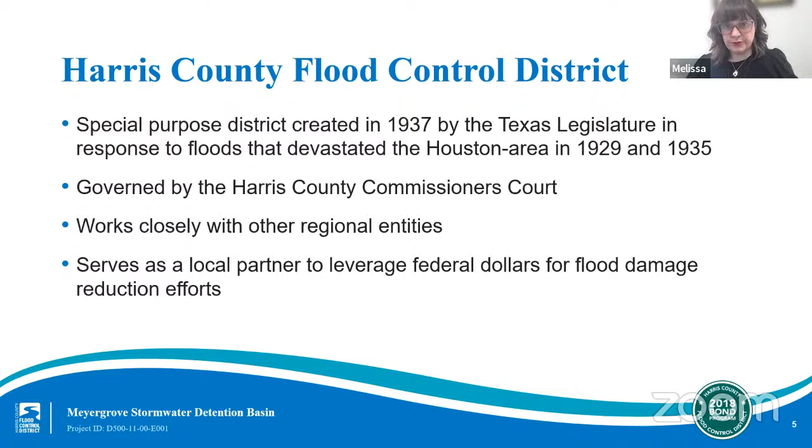The mission of the Harris County Flood Control District is to provide flood damage reduction projects that work with appropriate regard for community and natural values. One of the most difficult challenges we face is constructing effective projects that are sensitive to community and natural values in highly urbanized areas.

Harris County has 23 main watersheds, totaling approximately 1,800 square miles and more than 2,500 linear miles of channel—approximately the distance from New York to California. A watershed is a geographical region of land that drains to a common channel or outlet, and each watershed has its own characteristics and needs. The project we're presenting on tonight is in the Brays Bayou watershed, located in southwest Harris County.

Harris County and our surrounding area is flood prone for a number of reasons. We experience extreme rainfall events, including tropical storms and hurricanes. Our area is largely made up of flat, slow draining land. And finally, we see large concentrations of clay soils that do not soak up excess rainfall quickly.

While the Flood Control District plays a critical role in flood risk reduction, we are one of several entities involved in these efforts in our region. When rain falls on your roof, it flows through several jurisdictions, such as streets and drains managed by the Harris County Engineering Department, a municipal utility district, or a city, such as the City of Houston, before it flows into a larger channel, creek, or bayou that the Flood Control District owns and maintains. This slide illustrates the various jurisdictions, which sometimes we even share with other entities.

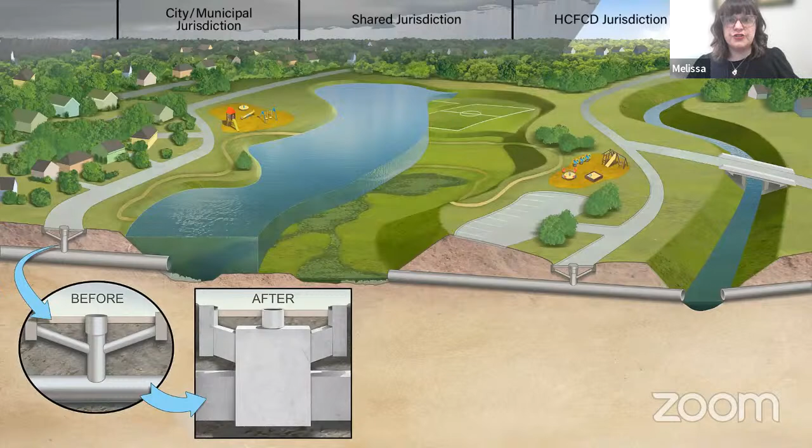In the middle is a stormwater detention basin, sometimes constructed by the Flood Control District. When storm sewers on the left are increased, this creates an increase in runoff. Since it is our policy to avoid any adverse impacts from our projects, detention basins help to safely take in and temporarily store excess stormwater during heavy rain events. Often we partner with Harris County precincts, utility districts, and others to add recreational amenities such as trails to these basins and along our channels.

On August 25th, 2018, Harris County voters approved $2.5 billion in bonds for flood risk reduction projects. This vote followed a series of 23 meetings with community members across Harris County, one per watershed, and resulted in a list of what is now 181 bond projects. 38 of those projects were added directly as a result of community input. The actual timing of each individual project will depend on a variety of factors, including environmental permitting, right-of-way acquisition and utility relocation, and in some cases, the requirements of a particular grant. Project lists and projected schedules are updated regularly on our website.

As bond projects move forward, we're making significant progress towards resilience in Harris County. We shared an update with Harris County Commissioners Court in January of this year and highlighted a few notable stats. We have completed or closed out 27 projects. We have secured $1.43 billion in partnership funding to stretch the bond funds even further for our community. And we've hosted more than 180 community engagement meetings. Your input is critical to our efforts, and we want to ensure that our conversations continue. We'll continue these biannual updates moving forward to share progress on the program.

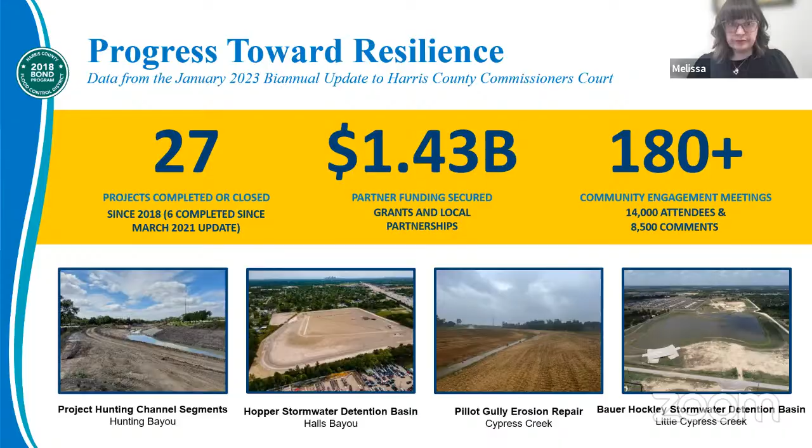While the bond was for $2.5 billion, the full cost of every single project in the bond tables is almost $5 billion. So we've made it clear from the outset that we would need funding partners to fully construct the projects in the bond program. As mentioned, we've had some success so far, having secured more than $1.43 billion in partnership funds for projects across Harris County.

This graphic illustrates the many sources of those partnerships, including federal, state, and local funding that the Flood Control District is working to secure for Harris County. Each agency has its own definition of eligible projects and its own requirements for local match funding, so the Flood Control District works diligently to match projects to the right partnership opportunities.

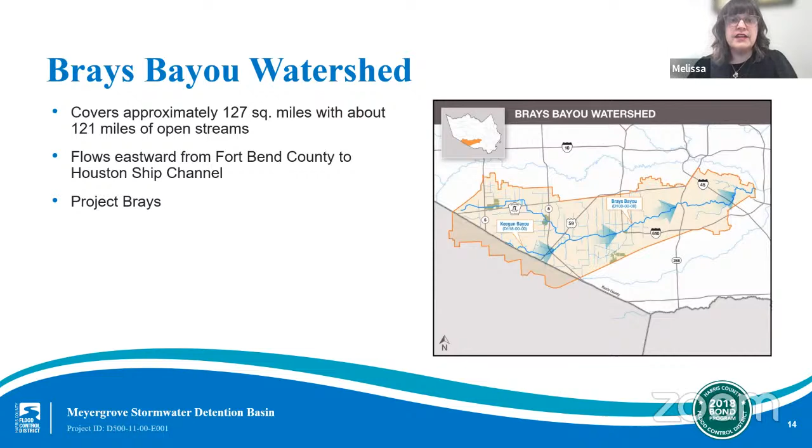The Harris County Flood Control District partnered with the U.S. Army Corps of Engineers on a major flood damage reduction project called Project Brays. Project Brays was a multi-year, $480 million project that substantially reduces the risk associated with flooding to tens of thousands of residents, as well as the many businesses and institutions in the Brays Bayou watershed.

Now let's talk about the Meyergrove Stormwater Detention Basin project specifically. This slide shows you the location of this project. This project site is located in the Meyergrove area, where Interstate 610 crosses Brays Bayou.

The project actually consists of two basins which will provide flood relief in the area. The sites are located along Braeswood Boulevard between 610 and Linkwood Drive. In 2022, $9.9 million in community-funded project support was secured by Congresswoman Lizzie Fletcher. The anticipated construction cost for this project is $5.5 million.

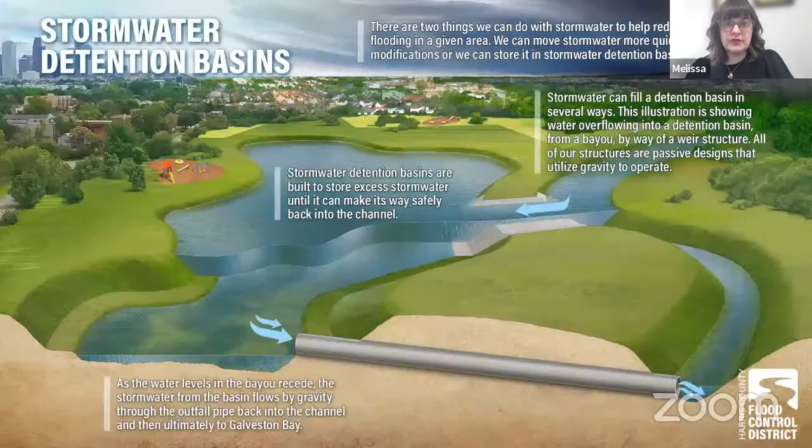Now I'd like to share some information about stormwater detention basins and how they work. A stormwater detention basin provides temporary storage for excess stormwater during heavy rain events. When the stormwater levels within the channel recede, the stored stormwater in the detention basin drains back into the channel by gravity via outfall pipes appropriately sized to drain the basin safely.

So let's take a look at the project sites. The Stormwater Detention Basin project initially consisted of one basin site near the intersection of 610 and North Braeswood. However, as funding and additional land became available, the Flood Control District added a second basin to the project further downstream to maximize the flood damage reduction benefits this project can bring to the area.

The Harris County Flood Control District formally identifies the larger of the two basins as D500-11-00, and the smaller basin is formally identified as D500-12-00. However, both basins together compose the D500-11-00-E001 project.

Both basins will function in a similar manner, temporarily storing stormwater from storm sewers in the area before releasing that water into Brays Bayou once the bayou recedes to the point at which it has available capacity. The Flood Control District is a no adverse impact agency, meaning we can't create improvements in one area which will transfer flood risk, or increase flood risk, in another area.

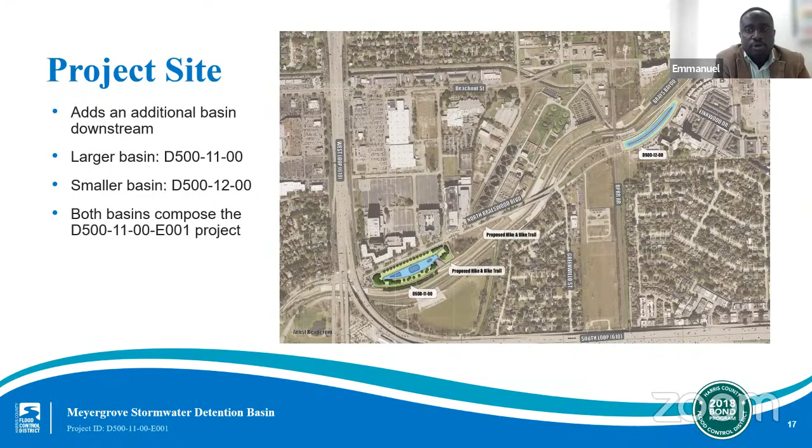This project is being funded by a grant from the federal government. This is Lizzie Fletcher. She was able to secure money for this, and so that's where the funding is coming from. I think it's like 7.5 million. I'm blanking on the cost of construction, the engineering estimate, but I think it's 7.5 million.

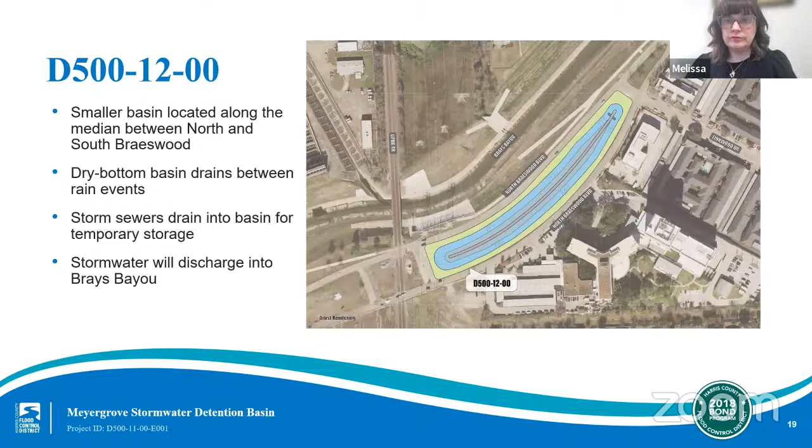All right, thanks, Melissa. We do have one more question for you. Lucy asks, what are the vegetation plans? Will they be similar to Willow Waterhole on a smaller scale? And will you be incorporating native prairie grasses and wildflowers?

Right now we don't have any plans for native prairie grasses in this area. We will be vegetating the project once it's complete to make sure we get turf established so we don't have future erosion problems. Wildflowers, I will get back to you on that. I know we do wildflower plantings in some areas, but I'm just not sure about these two areas specifically.

All right, thanks, Melissa. This next question is for Rusty. Ed Klein asks, how will this construction coexist with the current construction work at 610 over Brays Bayou?

They'll probably still be doing that bridge when we start. They could be finished, I'm not sure what their schedule is for that. So there could be some similar construction going on at the same time. Except, they're doing a bridge and we're digging a hole, so we won't be closing off traffic. Maybe a lane or two on an occasion, but not on a continual basis.

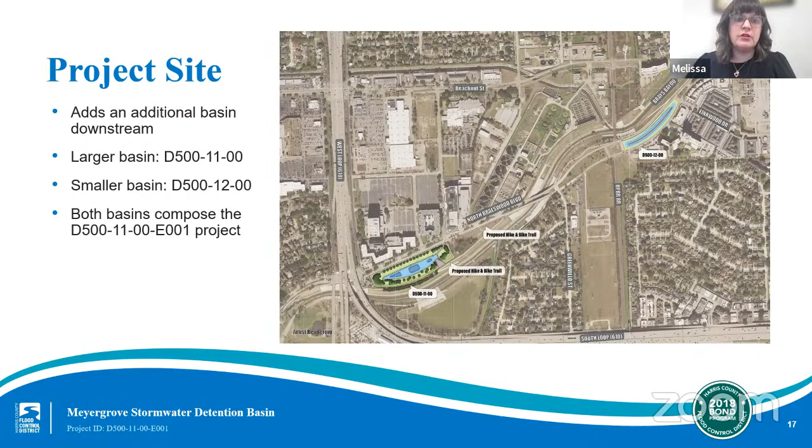And I just want to tag on to that, we're working with the city of Houston to use that land to dig out that second, smaller basin. And again, we did that because the amount of money that we had from the congressional delegation was able to cover both basins.

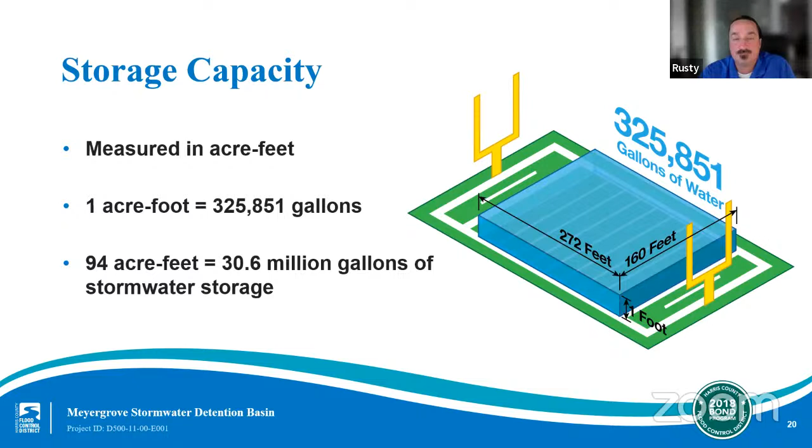We expect the larger basin to provide about 84 acre-feet of stormwater storage, and the smaller basin to provide 10 acre-feet. Together, they should provide 94 acre-feet of storage. For context, 1 acre-foot is approximately 325,851 gallons, and 1 football field covered in 1 foot of water is approximately 1 acre-foot. So you can think of the combined basins as holding the equivalent of 94 football fields of water, or more than 30 million gallons.

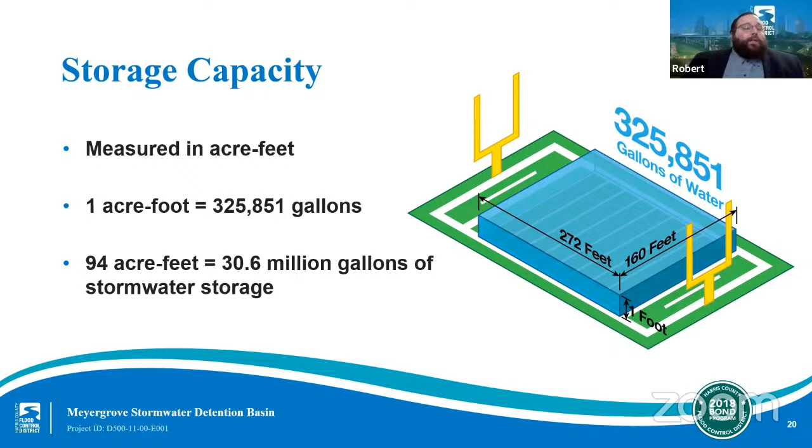Our next question is for Melissa. Melissa Stewart asks, why not put a pipe in the bayou and pump water downstream?

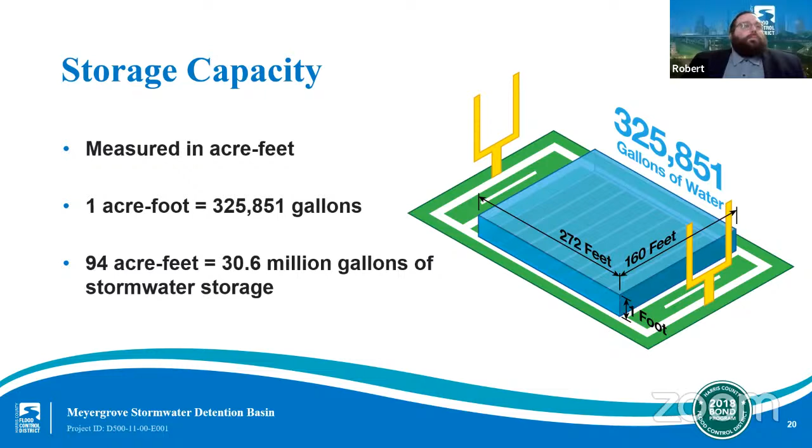That's a good question we actually get quite a bit. Harris County Flood Control District doesn't like to use a lot of pumps because of the maintenance involved. We do use pipes that connect from the bayou to the basins, and they just flow by gravity. So once the water recedes in Brays Bayou, the water flows down that pipe and continues downstream via gravity.

Thanks, Melissa. This next question is also for you. What is the difference between the two basin types, and which is better, a wet bottom or a dry bottom basin? Sure, so a dry bottom basin is designed to drain dry and remain dry between rain events rather than maintaining a permanent pool of water.

But in a wet bottom basin, the storage area is the area above the permanent pool to the top of the banks. Wet bottom basins have additional environmental benefits - they can provide habitats to fish and wildlife, and they improve stormwater quality. Both types of stormwater detention basins function to reduce flooding risks. The reduction for wet or dry depends on numerous factors, including the specific site location. In this case, due to its size, the smaller basin was designed as a dry bottom basin to maximize the storage capacity it can provide.

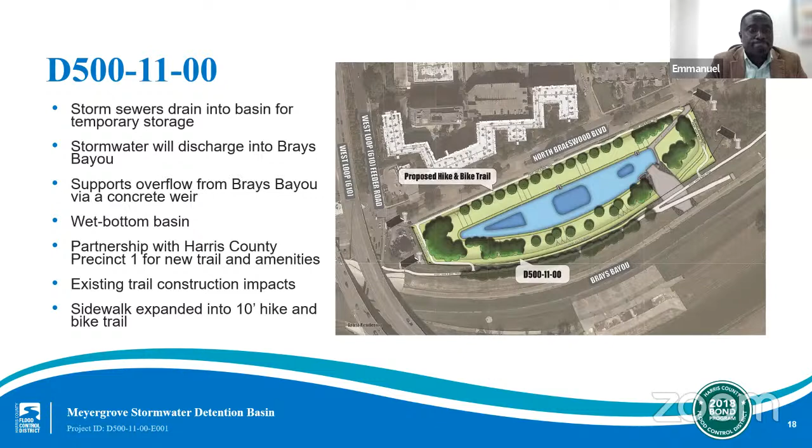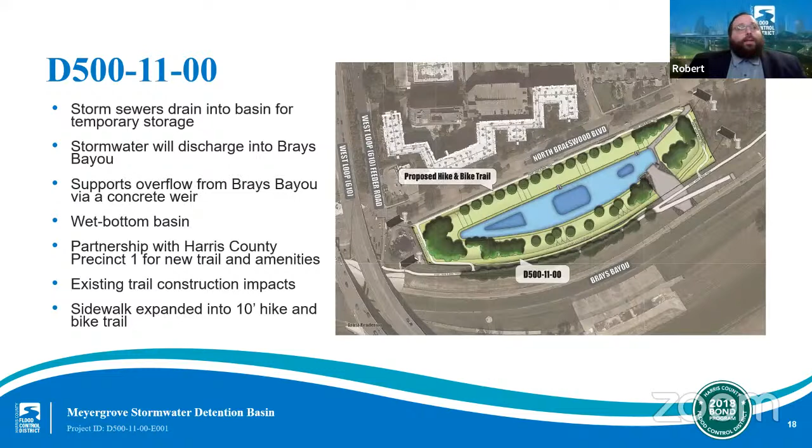Thanks, Emmanuel. We do have some other points coming in. One of tonight's attendees provided local references to help everyone better identify the location of the smaller basin - it will be between the railroad tracks and Three Brothers Bakery in that area.

Our next question is for Melissa. Melissa, how does this fit into the overall 2018 bond program? Yeah, so the flood control district's mission is to provide flood damage reduction projects that work, and this project was one of the many projects funded and sponsored by the 2018 bond program to reduce flooding risks to Harris County homes and communities.

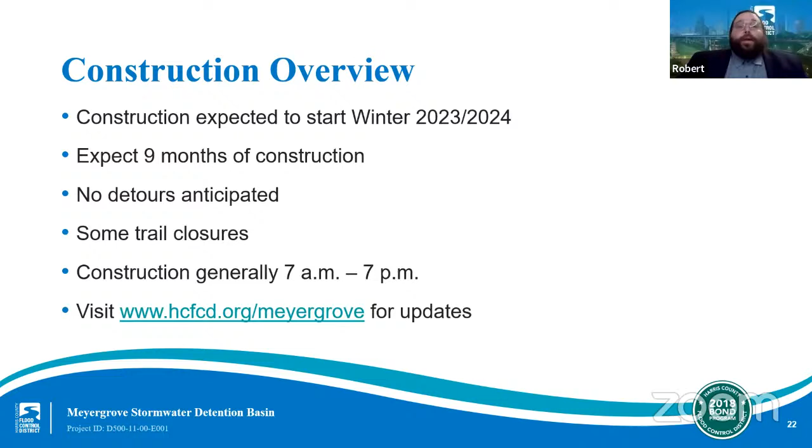All right, thanks Melissa. Our next question is for Rusty. Rusty, how does this detention basin relate to detention required for new developments in Harris County?

Well, the new detention requirement for Harris County requires 0.55 acre-feet per acre of detention, and they're offsetting their impervious cover and development, building into the floodplain. We're not building anything, we're just adding the detention. So it's being put in place just to provide detention, and that's it. It could potentially be used for something like a stormwater project with increased outflows, but that would all have to be modeled to make sure it works. Basically it's just detention, not a requirement to have anything else.

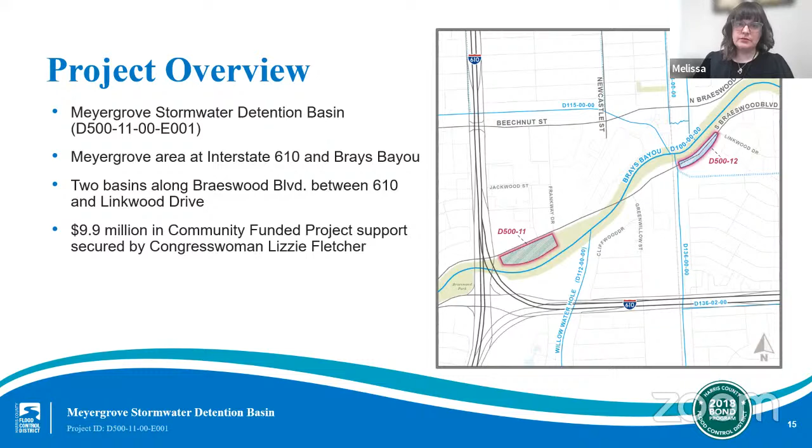Thanks, Melissa. We do have one more question, Rusty, if we could. This question goes to you: where can I go to ask questions after this meeting is over?

You can call us, you can email us, you can go to our website and ask a question there. Yeah, we're available.